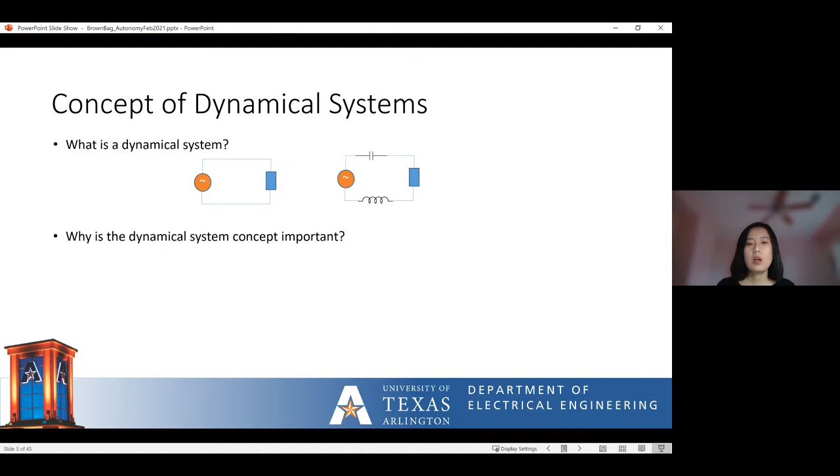In contrast, if we add the inductor and the capacitor, the circuit becomes a dynamical system because the capacitor and the inductor are energy storage devices, and the past voltage of the system affects the voltage of the system in the future. So the system becomes dynamic. Basically a dynamic system must have memory to be able to learn the past and become intelligent. The past information affects the information of the system in the future.

So this is a very important concept because it allows us to see that the data is not really static for systems of intelligence. There is a time dependency of the data that is important for the system. The systems and control field provides systematic approaches to capture such time dependence, such as the state space models.

For example, the state space models are shown on the right. We have the states to capture the past information up to the current time, and the states allow us to predict the future with the derivative term over there. The derivative term captures the dependency on time.

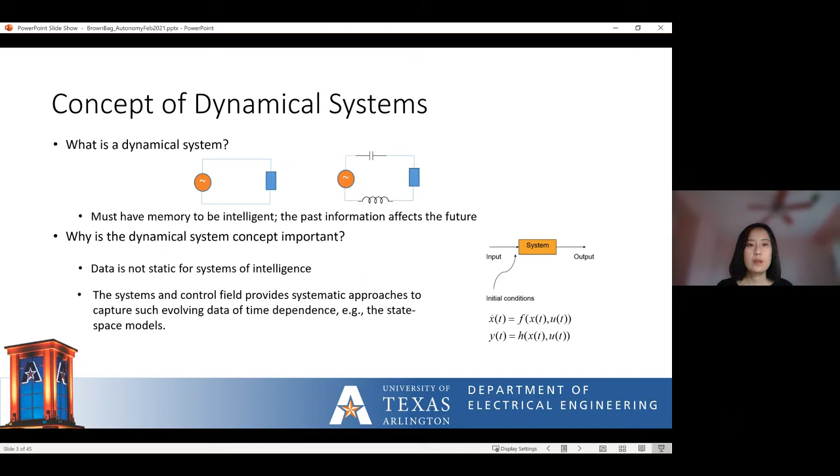So next is the concept of automatic control. Built upon the dynamical systems concept, the control, typically feedback control, uses the output to change the system's input, as the red feedback line shows in the picture. The output feeds back to the input, and together with the reference gives the error for the controller to generate the actuation signal.

This actuation signal allows us to shape the dynamics of the system to meet certain performance requirements, for example, rejection of disturbances. And this field allows us to come up with systematic ways to capture the system's performance, for example, stability, steady state error, transient performance such as overshoot, and robustness measures such as gain and phase margins. All of these are quantified measures that allow us to measure the performance of the system.

And the field also gives us systematic approaches to design a wide range of controllers such as P, PI, PID, LQG, and many others.

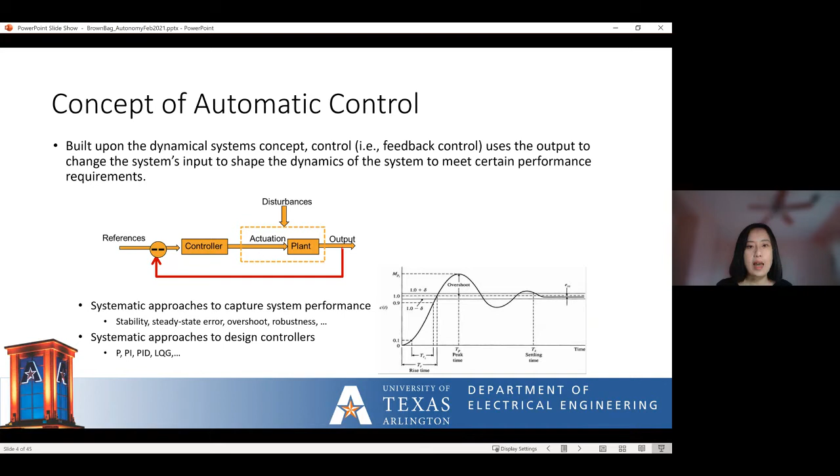So control systems are very common in our daily lives, and the most typical example is the air conditioner, and especially in Texas, we badly need it because of the very hot and also cold days as of today. So in an air conditioner, we have the sensors and controllers, similar to many other control systems. In an air conditioner, the sensors are used to monitor the temperature, and the controllers are used to actuate the heating and cooling system, for example, to turn it on and off. Sensing and control are very important for all control systems.

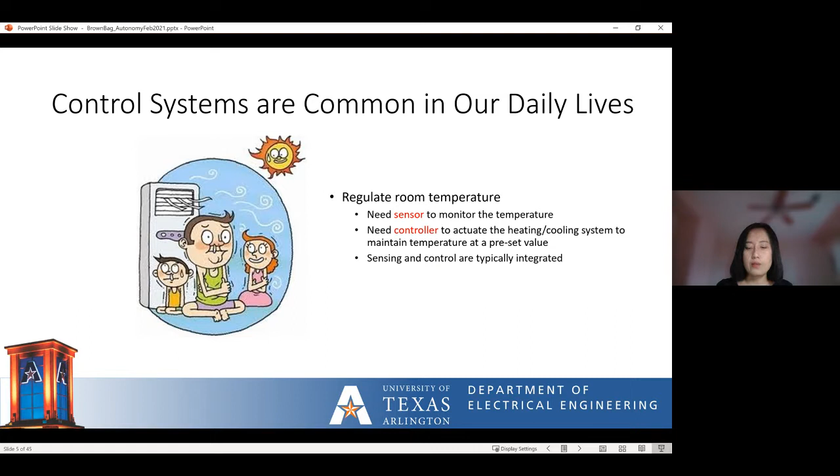And here's another example. So this is the driving scenario. If a human being is driving, the eyes become the sensors, and the controllers are basically the brain that decides whether we want to, for example, press a pedal. If it's automatic cruise control, then all of this is done by the computers. The sensor in this setting is a speedometer, and the controllers are used to actuate the engine to control the speed of the vehicle to meet certain performance requirements, for example, rejection of disturbances like hills.

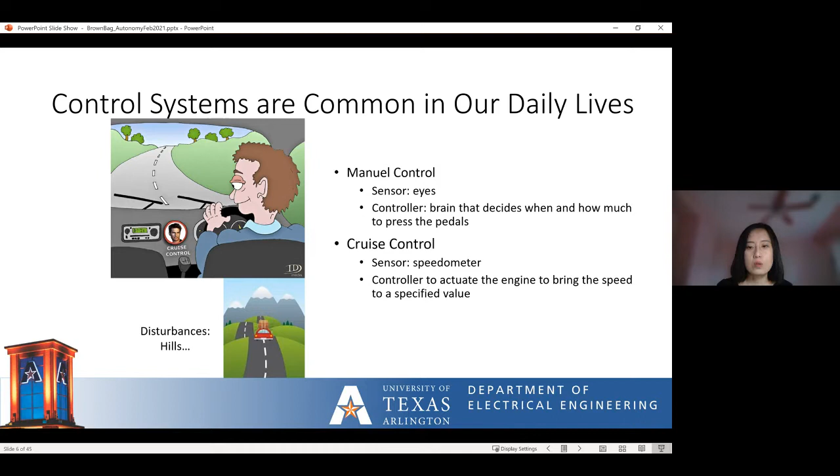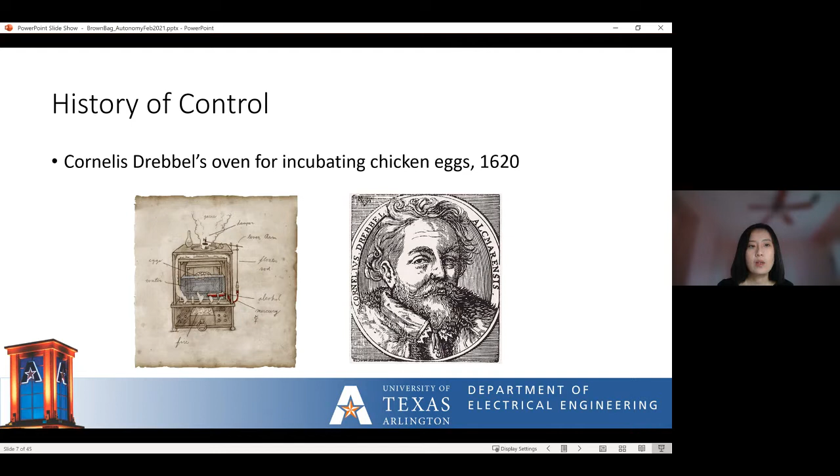The first feedback control system is considered to be Cornelis Drebbel's oven for incubating chicken eggs. That was in 1620. As the figure on the left shows, the vents can be opened and closed to have the right amount of air in the system for the fire. So this was a very simple mechanical control that can also be illustrated in this liquid level control.

So in this example, the system controls the right height of the liquid, and this is typical even in our toilets, right? So all of us have it in our homes. In this control system, when the water level is low, the float valve is open and the water can flow into the tank. And when the water level is high, the pipe is closed and the water cannot go in. So in this very simple system, the float becomes both the sensor to detect the level of water and the actuator to turn the water flow on and off.

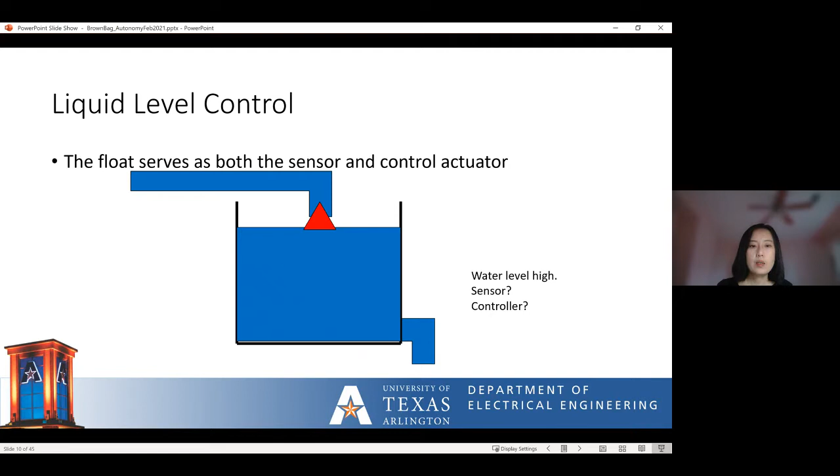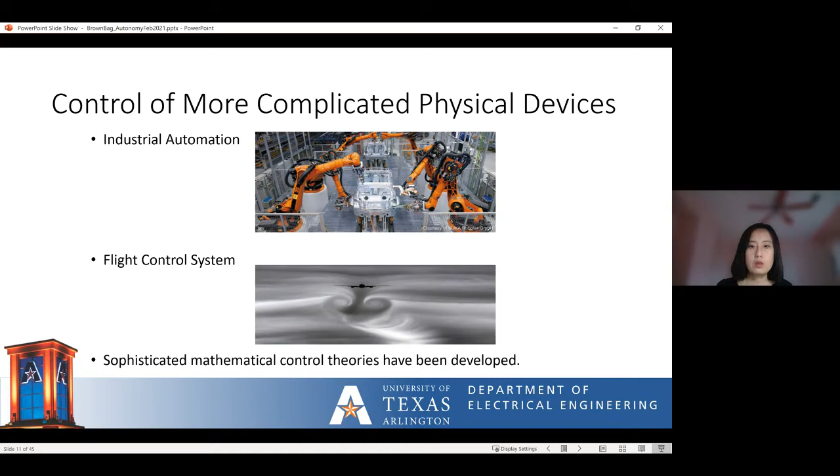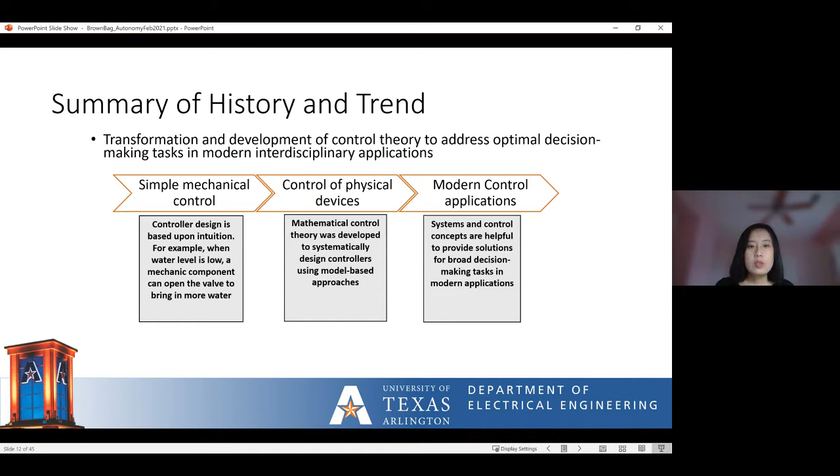If we look at control theories, they are fundamentally decision-making theories that allow us to come up with optimal decisions. So they can be applied to much broader applications, not just physical devices. This is in alignment with the industrial revolutions. We have these four industrial revolutions. The first one is Industry 1.0, which is considered to be mechanization and water and steam power. Industry 2.0 was featured by electrical energy, mass production, and the chemical industry. Industry 3.0 is something we are very familiar with, which includes automation, computers, the internet, and electronic devices.

This leads to the next step, Industry 4.0, which is featured by autonomy, big data, AI, IoT, cloud computing, robotics, and cyber-physical systems. So we can see that the transition from automation to autonomy marks the transition from Industry 3.0 to Industry 4.0. In automation, the machines basically conduct function-specific tasks defined by humans. In autonomy, the systems have more intelligence to react to uncertainties, unknowns, and unexpected events and faults.

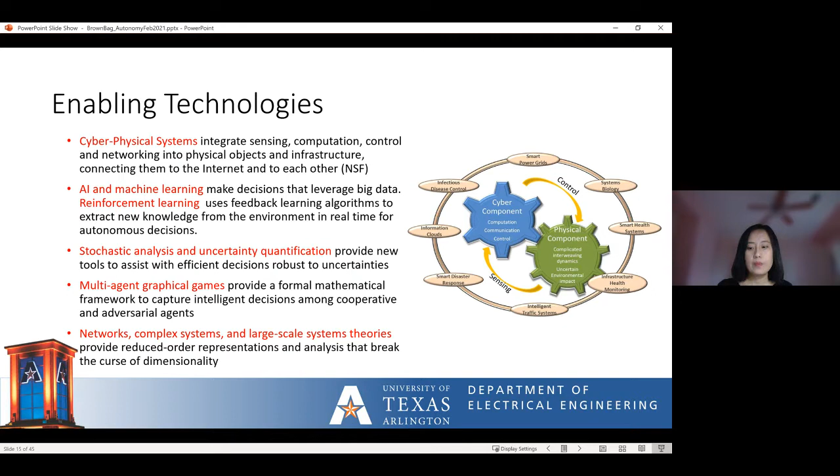So next, I'm going to talk about some smart city applications that show how the technologies I mentioned in the previous slides can be used for agents to be equipped with more intelligence. The first one is autonomous driving, and I'm going to show how game theory and reinforcement learning are being used. This is with my colleague, Dr. Frank Lewis, our colleagues at Ford, and some of our students.

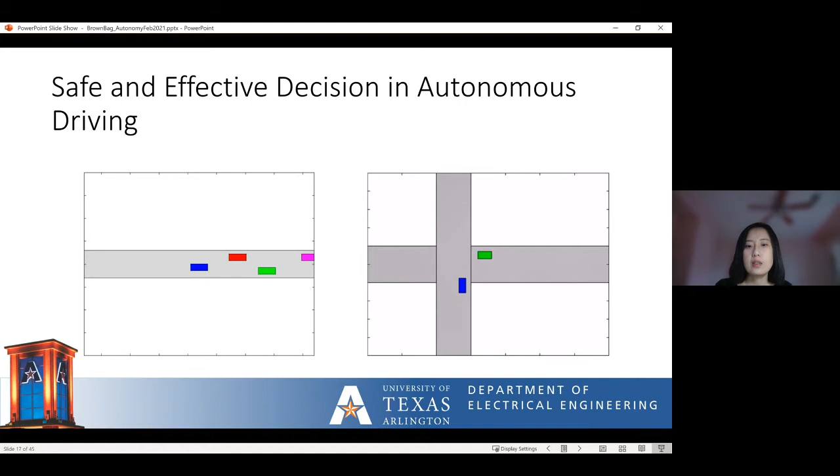So we spent a lot of effort developing game theory and reinforcement learning to give autonomous agents such intelligence. And funded by some of our other grants, we look at graphical games and distributed reinforcement learning. So here's a brief background. In multi-agent control, consensus has been studied a lot, but consensus does not generally produce optimal decisions. And distributed optimal control has also been studied, but it does not allow the agents to have self-interest.

So game theory is a useful mathematical framework because it allows agents to have their self-performance cost to be optimized. The standard game is not a new concept, right? It has been there for a long time, but standard games use static and immediate cost, so they're not dynamic. But in differential multi-agent games, game theory is integrated with the dynamics and also control theory to come up with feedback optimal solutions.

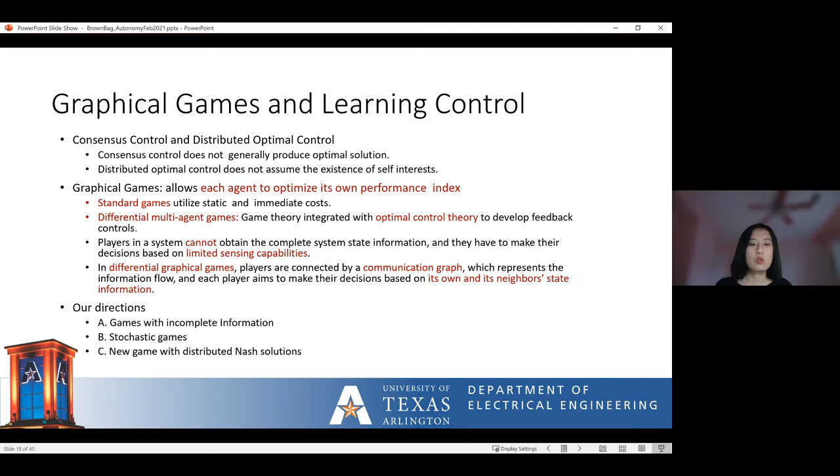And in scenarios where the agents cannot have all the information of the systems because of limited sensing capabilities, we need to come up with the graphical game. So basically we use a graph to capture the limited communication capabilities. And we have developed results for games with incomplete information to address unknowns, stochastic games to address uncertainties, and also new games with distributed Nash solutions. And here is a very brief illustration of the results.

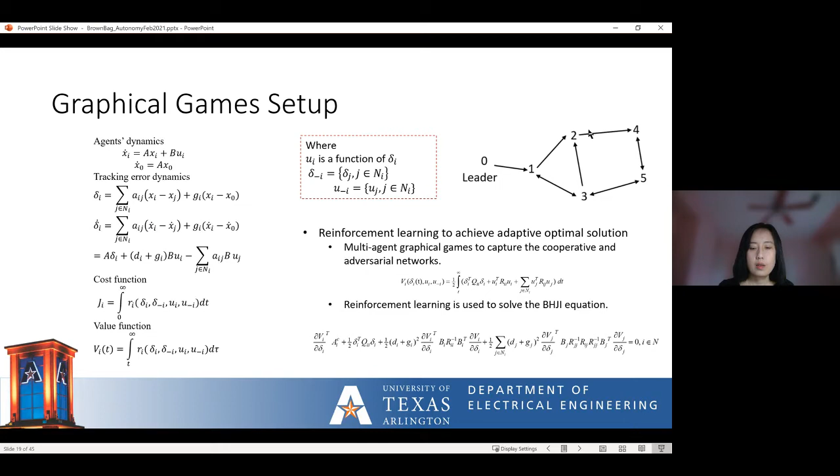So in many scenarios, the agents cannot have complete information. Consider a group of UAVs, unmanned aerial vehicles, in the air, and they want to have collision avoidance. A vehicle may not know the other vehicle's type. For example, is it a jet or something else? And it does not know their possible actions. So in that sense, the agents are playing a game of incomplete information.

So what we do is come up with Bayesian graphical games, which allow the agents to learn the type of the game. This is done through a belief update procedure. The actor-critic framework is typical for reinforcement learning to come up with a decision, but we add a belief update that allows the agents to have the intelligence and learn the type of the game that they are playing.

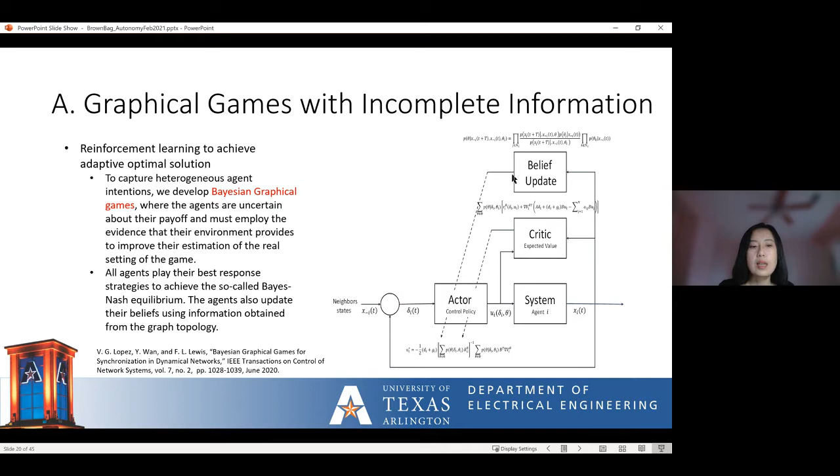So for instance, as humans, right, we make random decisions all the time. Like today, I may eat an apple, and tomorrow I may eat a pear. And there's really not a justification for the decision that I make. So in the future, intelligent agents are going to have such random decisions as well, and we use uncertain intentions to capture those.

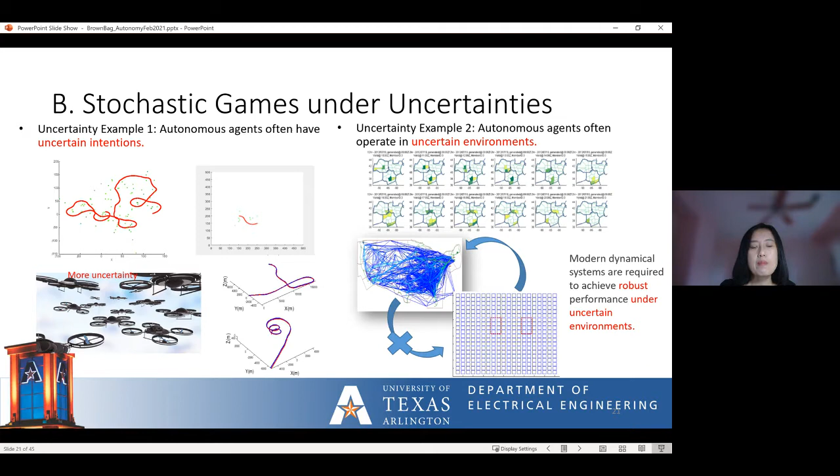So basically, it smartly chooses a few samples to come up with the best decision. This allows the order of computation to be reduced and breaks the curse of dimensionality for decision making. So this shows how the agents can address the uncertainties.

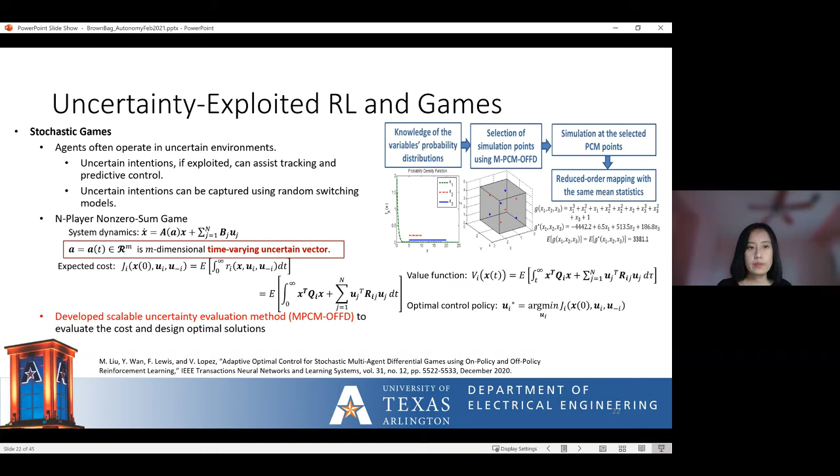And we also come up with games that can produce solutions that are both optimal and distributed, limited by the graph topologies. We found that existing game solutions are either optimal or distributed, and we come up with a new game setting with extra terms that allows the equations to be decoupled and produce decisions that are both optimal and distributed.

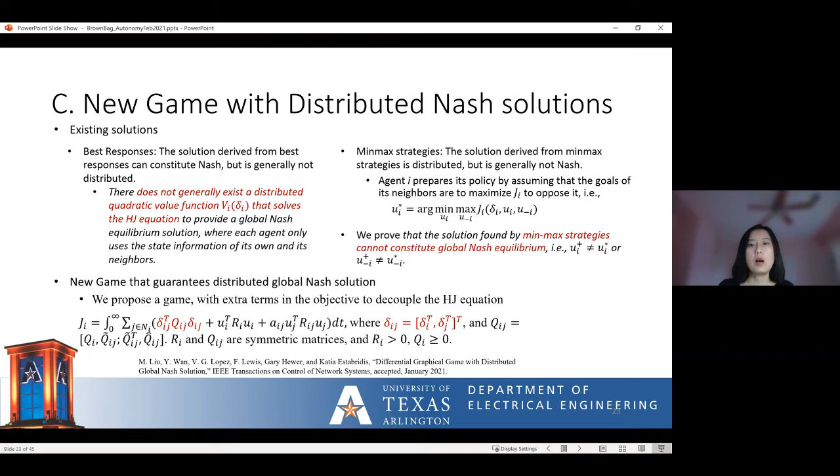So that was application 1 on autonomous driving, showing how game theory and reinforcement learning can be used for agents to deal with uncertainties and unknowns. And the second application that I'm going to talk about is smart emergency response using UAVs.

So from 2013 to 2017, we formed a group called the Smart Emergency Response System with collaborators from Boeing, MathWorks, National Institutes, MIT Lincoln Lab, and some other universities. This effort was to attend the Smart America Challenge initiated by the White House. And we came up with a smart emergency response system of both air and ground vehicles to assist with emergency response. And the technology was praised by the chief technology officer at the time as an exemplary success.

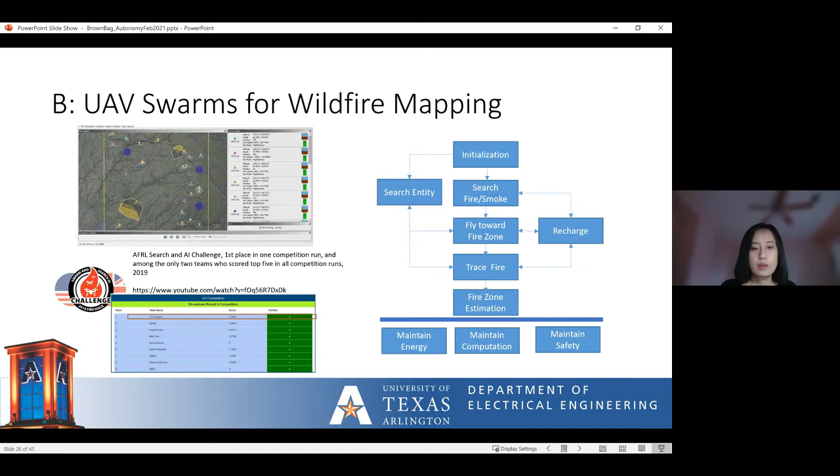So another emergency response direction we worked on is on-demand emergency communication. In emergencies, communication is very, very important. It was studied in Hurricane Katrina that the complete devastation of the communication infrastructure is a key reason that led to the delay of the emergency response.

So in an emergency, the cellular towers may be down, and what we can do is send out the UAVs to the disaster area. The UAVs set up the communication network in the air and provide Wi-Fi service to the ground to facilitate the emergency response.

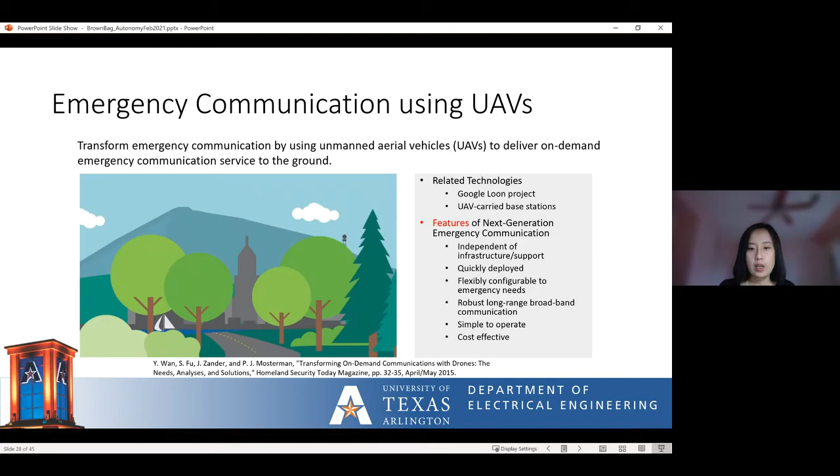The features of the system include, for example, that the communication infrastructure is independent of any ground facilities, and it can be quickly deployed, flexibly configured to emergency needs, and provide long-range and broadband communication. It should be simple to operate and also cost-effective.

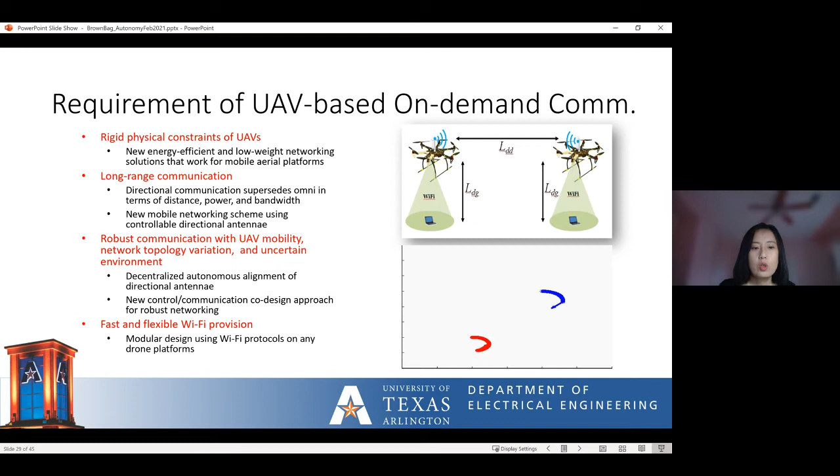So to address this, we came up with a solution that allows the UAVs to be equipped with directional antennas. Directional antennas allow the energy of communication to be focused in certain directions to reduce the energy and also reduce the disturbances. This requires the antennas to be self-aligned despite the disturbances and the mobility of the UAVs. To have such intelligence, we need the cyber-physical systems concept.

So the CPS concept is described by the following two directions. One direction is control that benefits the networking. Basically, we have intelligent control of the directional antennas that allows the communication channel to be formed despite the disturbances. In the other direction, for example in an unknown environment, the GPS is not known, right?

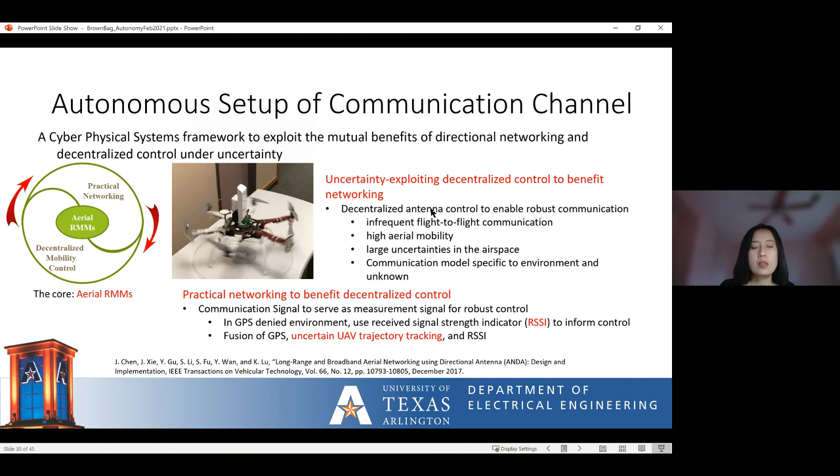In this setting, we can use the communication signal, the received signal strength indicator, as additional measurement signals for the control. The two directions allow us to come up with a robust communication channel despite various disturbances. And this is the solution of our software.

The complete framework has the UAV's intention, stochastic intention estimation, and reinforcement learning-based optimal control to come up with the decision even when the communication environment is unknown. The reinforcement learning is able to learn the uncertain communication environment.

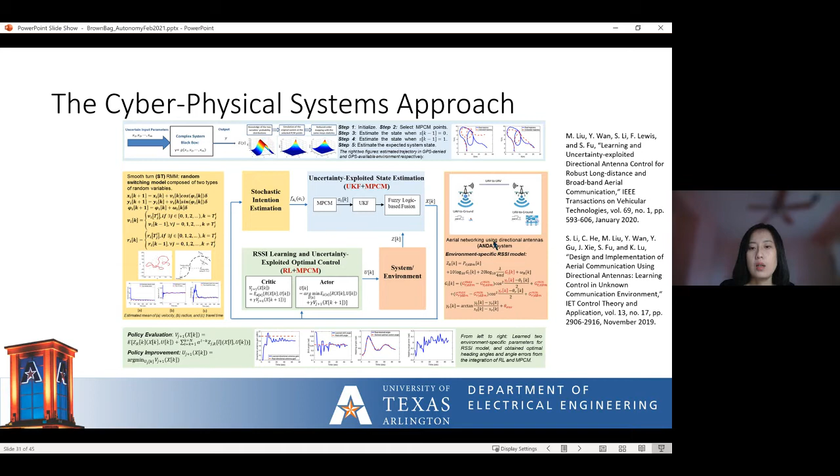We came up with the software and hardware for the system. This is a drone platform, and we have the directional antenna control on it. We also developed a computing device that is very small in size and low in weight that can be put on UAVs.

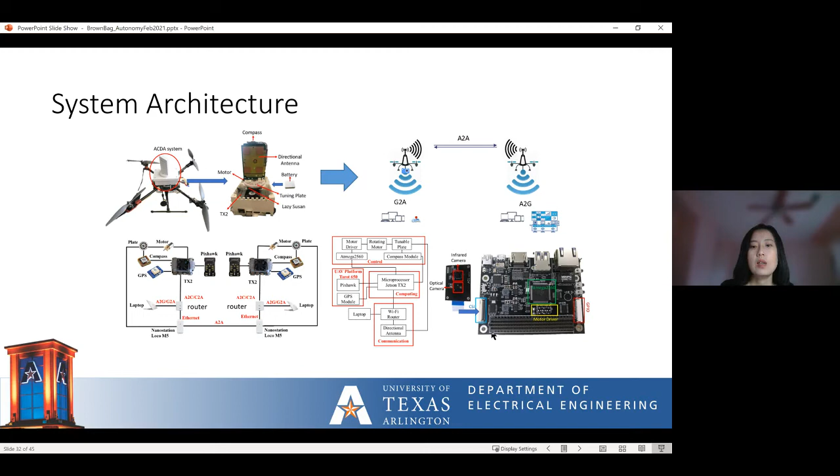This is the extension of the communication system that we built. We came up with a networked computing system that can also do distributed computing among the UAVs and other robotic platforms. The solution includes four parts: the quadrotor UAV platform, the control unit, the communication unit, and the computing unit, which utilizes some virtualization functions. As you can see, this shows the cyber-physical systems concept that integrates all the different things.

Supported by the National Science Foundation CRI grant, we built this networked computing system to support the community. All of our solutions are listed on this website, and we conducted many workshops to promote this area, and we also organized several student design competitions for research groups to use this platform. There's an upcoming one in May this year.

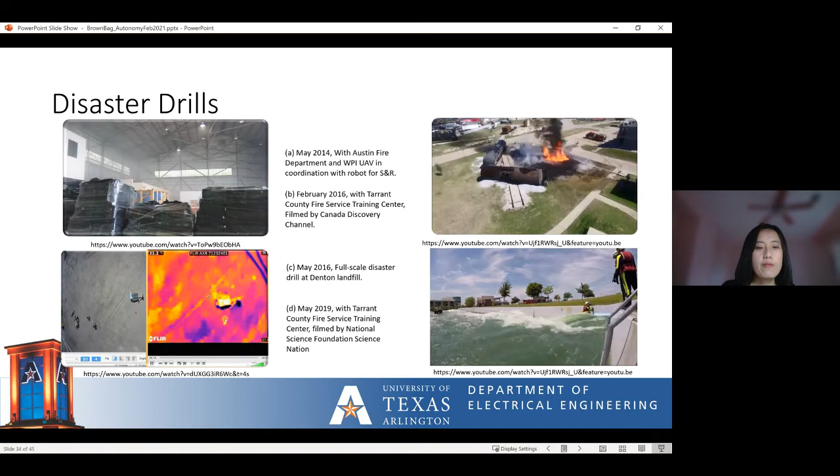So here are a couple of disaster drills that show our solution. The first one was conducted in 2014 with the Austin Fire Department, where we show the UAVs, the unmanned aerial vehicles, and also the ground vehicles together can quickly find the victim in a chemical leaking environment. So we don't know where the victim is, and the environment is complicated.

But we can send out the UAVs. The UAVs have the aerial view that can easily detect the victim and send such information to the robot controller. The UAVs also establish the aerial communications that allow the robot operator to remotely control the robot. So the coordination among the UAVs and the ground vehicle allows the system to quickly find the victim.

So the second video on the bottom here shows the use of the UAVs to provide on-demand emergency communication. In this scenario, this is conducted with the Denton Fire Department. This was a full disaster drill where the Red Cross and also police officers and the hospitals are involved.

So in a post-tornado scenario, we don't know where the victims are. So in the first few minutes of the disaster, we send out the UAVs, which can find where the victims are and send such information to the management center. The management center is located inside a room. The emergency people do not need to leave the room and directly get the information from the disaster zone. Such information is very critical because it can be handled in the first few minutes of a disaster.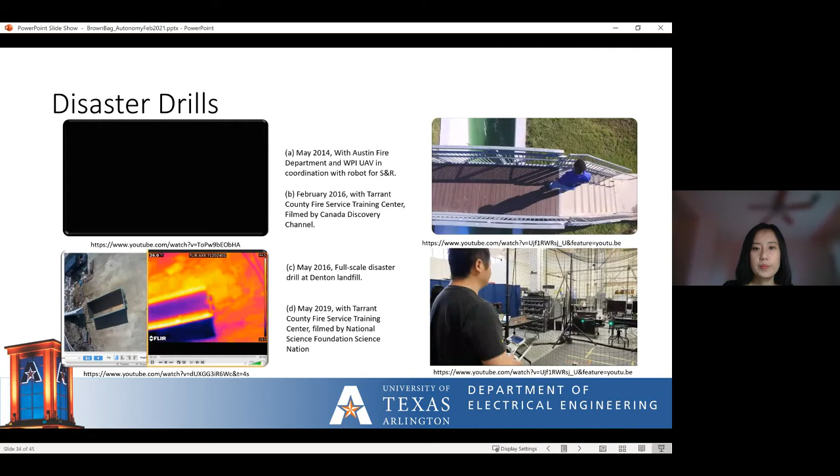So the on-demand communication that we built can have other applications. For example, beyond visual line of sight control, where the operator cannot directly see the robot but uses relayed communication to control the robot. It can also be used for multiple UAV formation and remote infrastructure health monitoring.

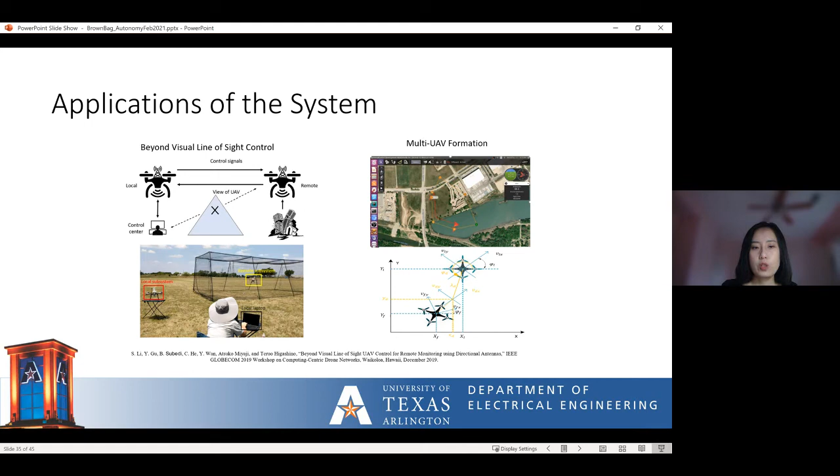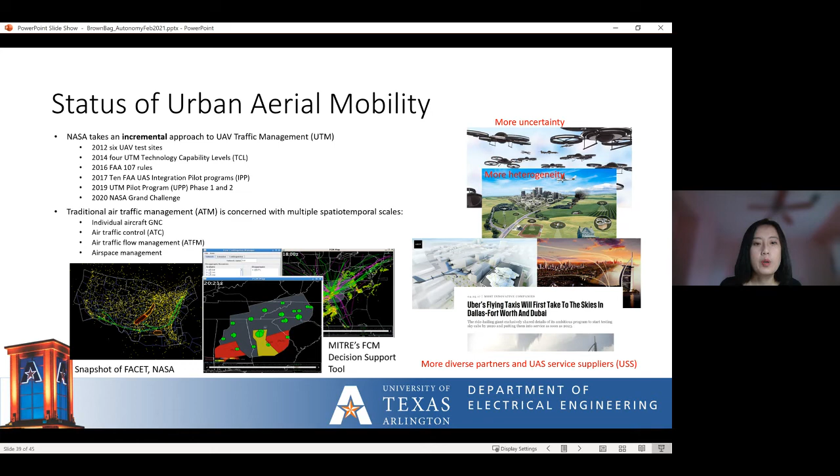So to address urban aerial mobility, there are fundamental research challenges along multiple directions, including on the vehicle side, like the UAS vehicle and ground support automation, and on the airspace side, for example, capacity and airspace management, and also mission planning of UAVs, contingency management, and human systems. Human is also a very important part of this whole story.

So my group has worked on several directions under this topic. Here I show some of the results, and the first is airspace capacity. We mentioned that UAVs have very uncertain trajectories. So we came up with a stochastic capacity framework to measure the capacity of the airspace. Basically it says how many UAVs can safely fly in a confined airspace.

So the stochastic framework captures the random UAV mobility and also the physical constraints, that is the sense and avoid protocols. And from the modeling framework, we come up with the node distributions, the collision probabilities, which lead to the quantified airspace capacity concept. So this allows us to design the solutions to make sure the safety of the airspace. So basically, the number of UAVs does not exceed the airspace capacity limit.

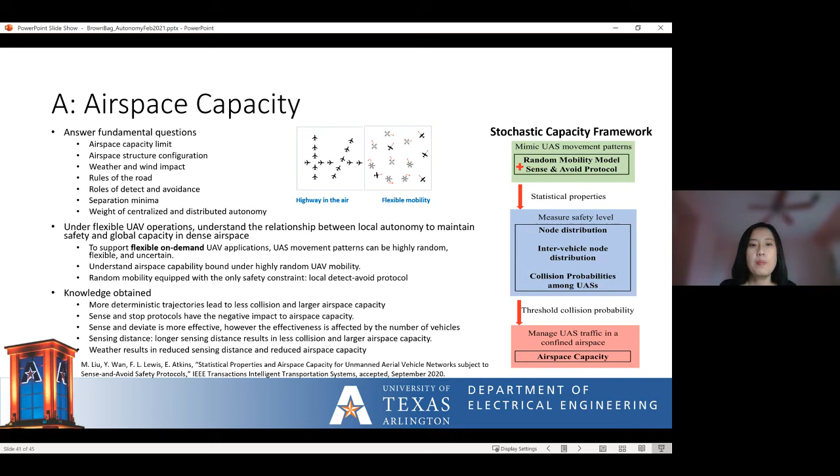So weather is very important for UAVs, especially because of their small size and sensitivity to weather. So assuming that in the future we have the weather for the small UAVs, we need to consider how we can use such weather information to guide the UAVs. And we studied a lot on the weather for the flights and also UAVs.

So for example, we considered a spatiotemporal scenario data to capture the weather. And we developed the influence model-based weather framework to capture the weather. And so the data basically shows not only the temporal dependence, but also the spatial dependence as well. And we come up with an estimation solution to construct the model from the observation data.

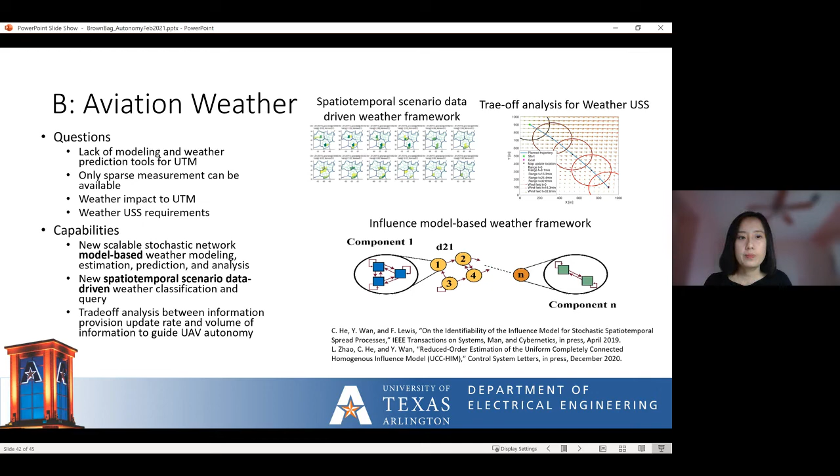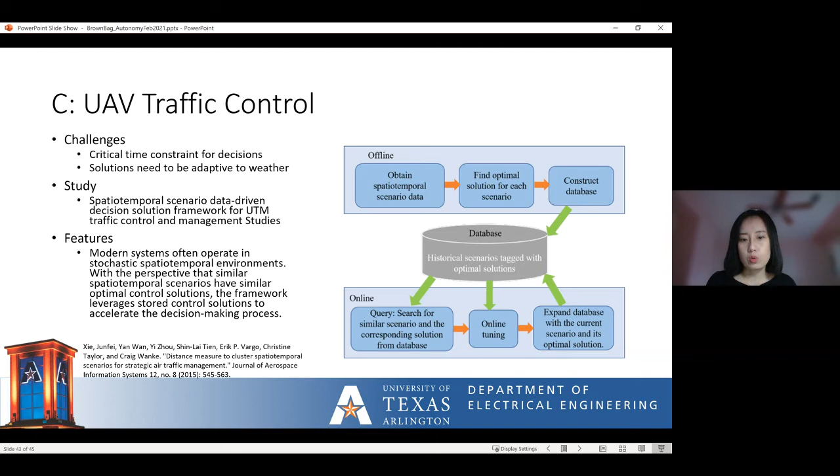Next is the UAV traffic control. Suppose the weather information is available, we can use the database to serve as a kind of playbook to guide the UAVs based upon different weather scenarios. And on the right shows the solution that we come up with that integrates the offline operations, the database query of the spatiotemporal scenario data, and also the online optimization solution to quickly find the best solutions.

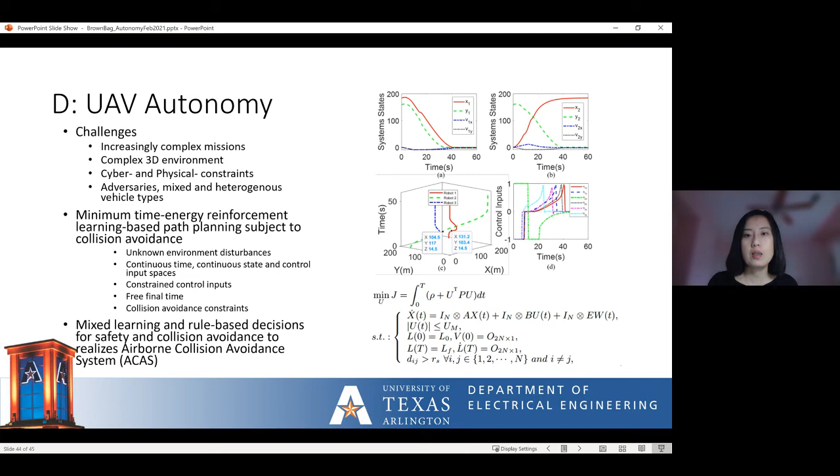So the next one is the UAV autonomy. We have the unknown weather. So the UAVs need to be guided despite the unknown and also uncertain weather. So for this, we come up with the reinforcement learning-based solution to learn the unknown environment. And the solution allows the UAVs to go to their destinations with minimized time and also energy. They can also avoid collision with the others, based upon the mathematical solution.

So this is the end of my talk. So basically, I talked about the control background and also the automation transition to autonomy, and also used several applications to show the smart city applications. And these works are with my collaborators, for example, including Frank Lewis in EE at UTA, and other important collaborators as well. My students and postdocs also contributed significantly to these studies, and we have established a close collaboration with the local governments and also industries on technology transfer.